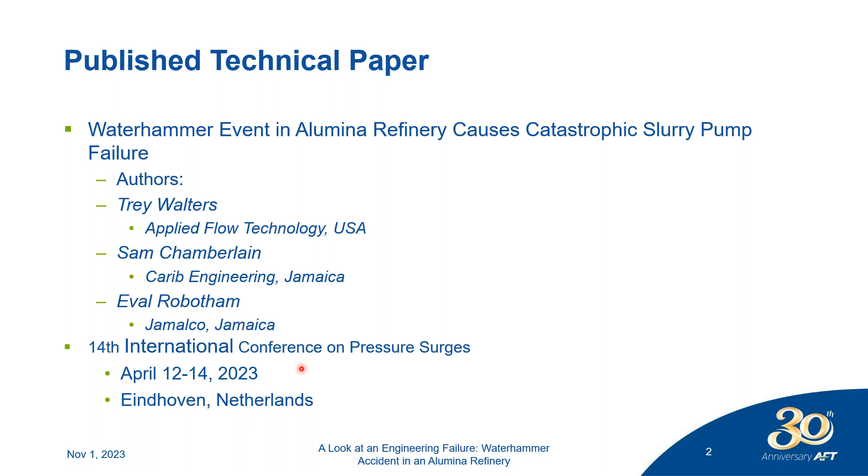Thank you, Ben. So I guess some of this I explained, but let me go through if there's anything here that I need to summarize. We talked about this already, so I'm sorry, and I apologize for the slides not advancing.

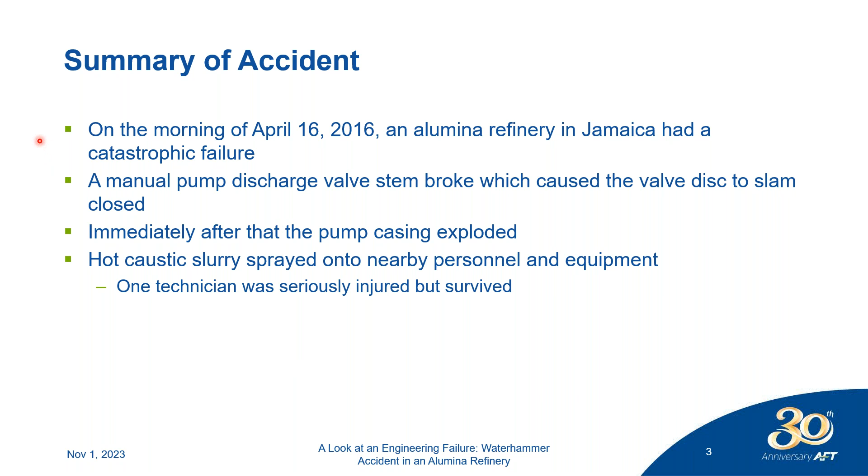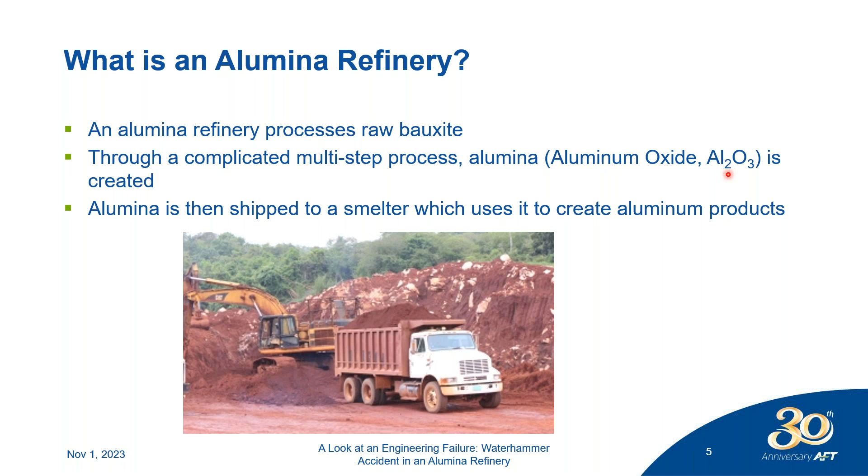Okay, let me come back to the Bayer process so we can see this better. We'll restart. Fortunately, I don't have a full hour of material, probably about half an hour, so we should be good here.

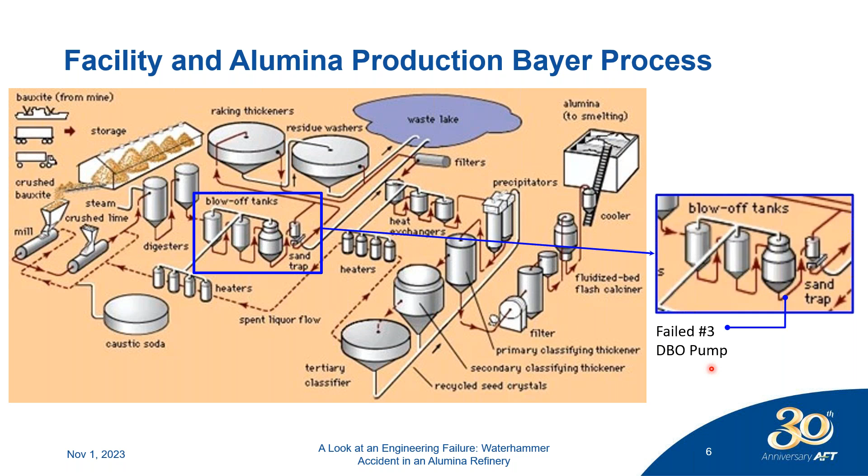Okay, so let's go ahead and dive in and look a little bit more here. I'm going to go down into the detail and talk about this a bit. It's not that complicated, as you can see in the diagram, but I'm going to outline what was going on and what happened when the event happened.

Okay, so this is the digester blow-off system, the DBO system. At a high level, there are 2 tanks that are separate physical tanks. They each have 2 lines that go out, and then the lines come out ultimately through pumps, which are the slurry pumps, the digester blow-off pumps, number 3 and number 4 in this case. They come through 2 valves, and go into a pressure measurement here, and then off to a long line that goes out to the sand trap. This is where number 3, the pump that failed, is located.

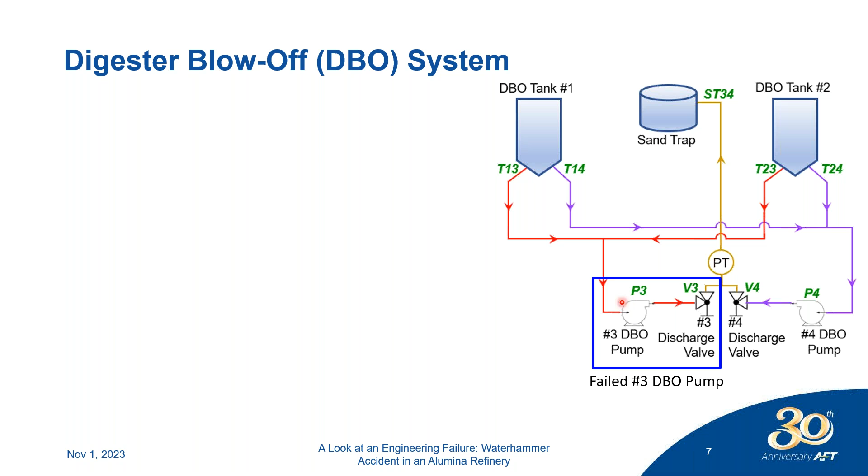Okay, and just so you can see the line lengths and diameters, this gives you an idea. The ones in purple and red are not that long, you can see we're talking about 3 to 7 meters, 9 to 23 feet. The longer line is this gold line, after you go through the valves, past the pressure transmitter, out to the sand trap, and that was about 105 meters or 344 feet. The line sizes range from 14 up to 24 inches, or 350 up to 600 millimeters.

Okay, so the fluid they were pumping was a caustic slurry with a density, specific gravity of 1.26. Near atmospheric pressure at the pump suction as it comes out of the tank into the pumps. The discharge was about 4 bar gauge, roughly 60 PSI gauge at the discharge of the pumps. The pumps themselves were rated for 100 PSI, about 7 bars, the maximum pressure rating. The temperature of the hot caustic slurry was 110 degrees C, 230 F, a little bit over boiling point, but that was because it was slightly pressurized, a little over 1 atmosphere, so it could hold the fluid in liquid form at this point.

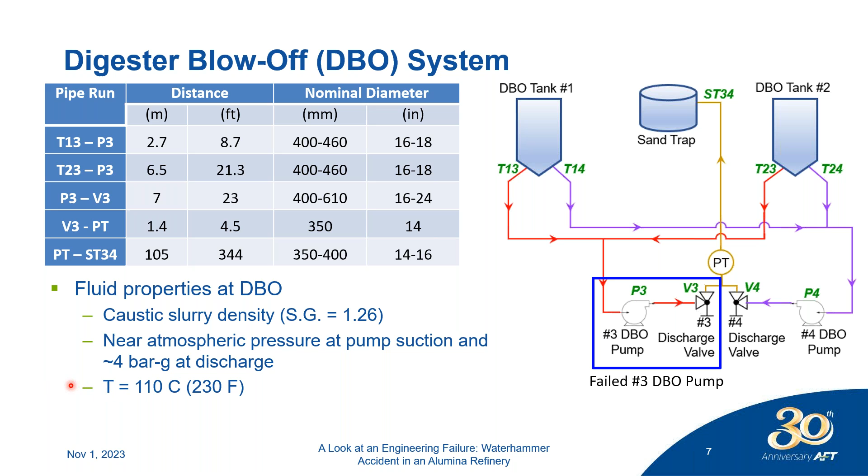Okay, so let's now talk about the operating procedure of what happened here. There are 2 pumps that serve the 2 DBO tanks, pump number 3 and pump number 4. I'm not going to talk about it here, but there was also a whole other identical separate process with the number 1 and number 2 pumps, and 2 other tanks. So there were 4 pumps altogether, 4 tanks. In general that doesn't matter, except for the fact that there was a repair history and service on the 4 pumps that is actually important to why the accident happened. I will recap that more at the end.

Right now we're going to talk about this part that was called unit 2 operation. There's 2 pumps, but only one operated at a time. Every morning the pumps are cycled. The reason there's 2 pumps is to have some redundancy, like a spare pump.

The practice at the facility was every morning they would switch from number 4 pump to number 3. They would run number 3 for 24 hours, then switch back the next day to number 4. So each pump ran about 50% of the time, every other day, running the full day.

The summary of the procedure over 8 minutes was - I'm going to go through this step by step what was going on - but this was early in the morning at 6:29 a.m. local time. They'd have number 4 pump running and number 3 pump off.

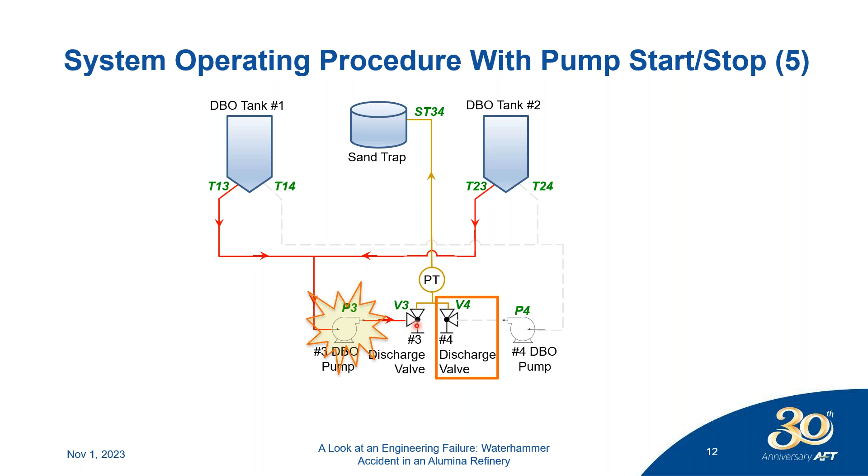But they never got there that day, because in the step between closing this valve and turning off this pump, in a window of about 8 minutes, this valve broke. The valve stem slammed shut, and when it slammed shut, that sent a pressure wave from the discharge valve number 3 back to the number 3 DBO pump, and that's the pump that actually catastrophically failed.

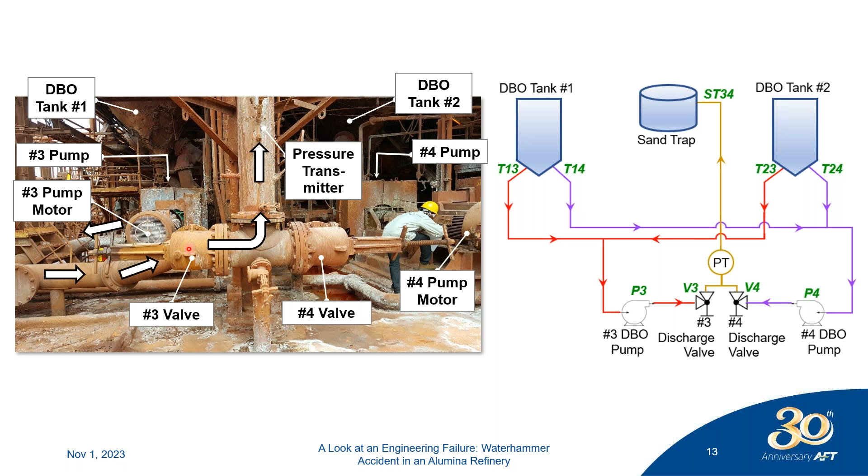So when that happened, it caused this disc to move inside in such a way that the fluid was coming in, it caused the disc to move and caused the fluid to come to basically an instant stop, like a Joukowsky pressure spike. That's what happened. So this valve broke, the pressure wave then went down this line back towards the pump, and then the pump behind here will show you what happened to the pump.

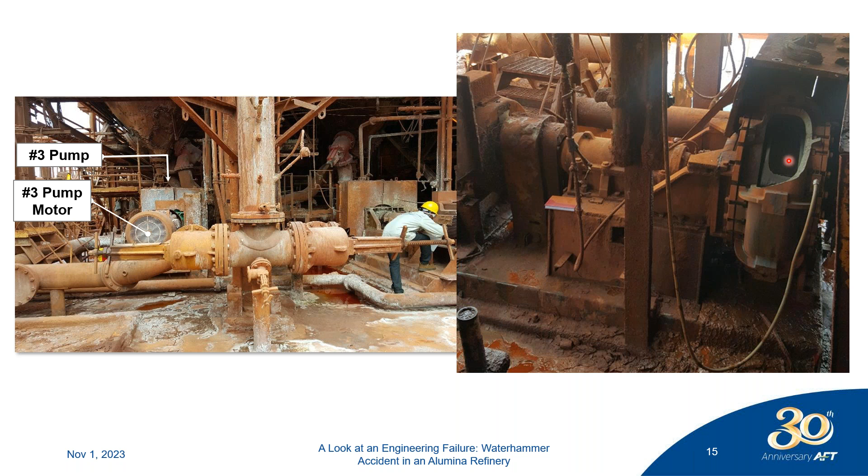Somebody had asked about the model of the pump, and you can see now it's a centrifugal pump, and it was made by Goulds. There is some information in the technical paper that'll tell you some of the specs on the pump.

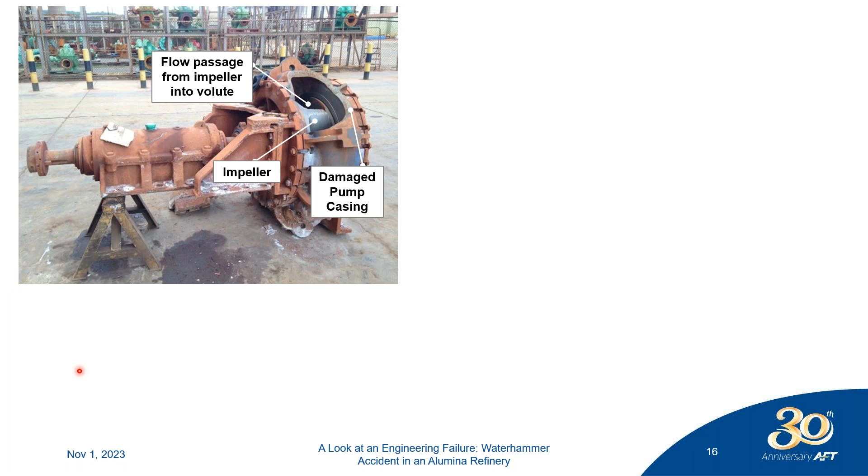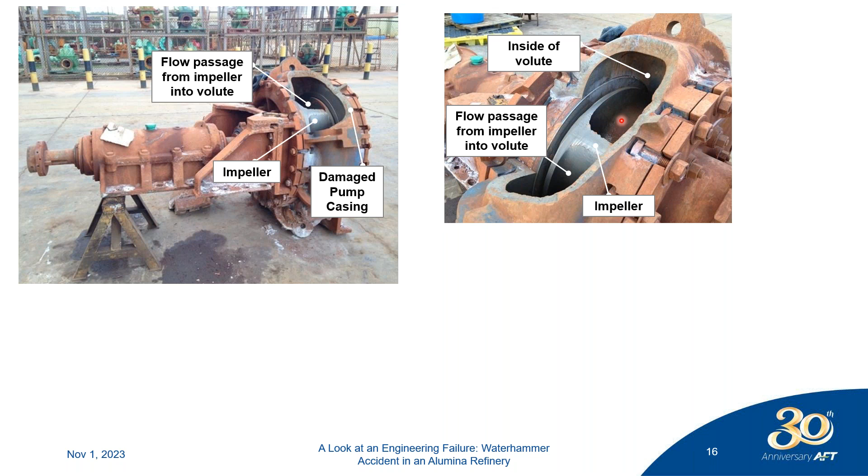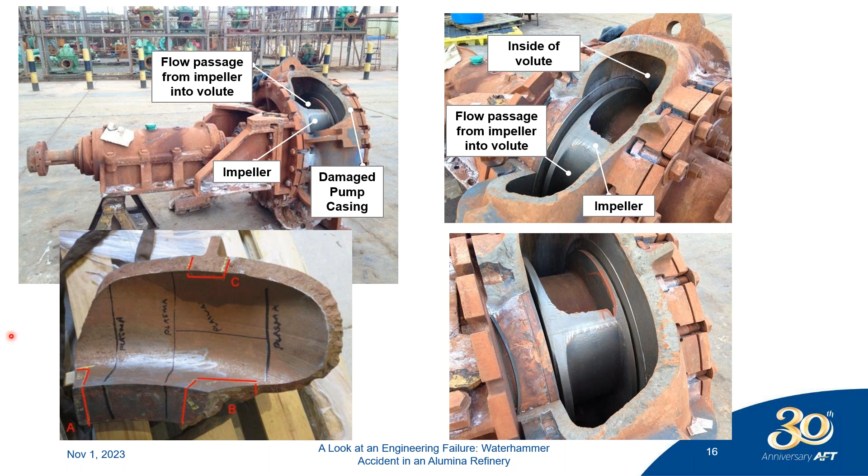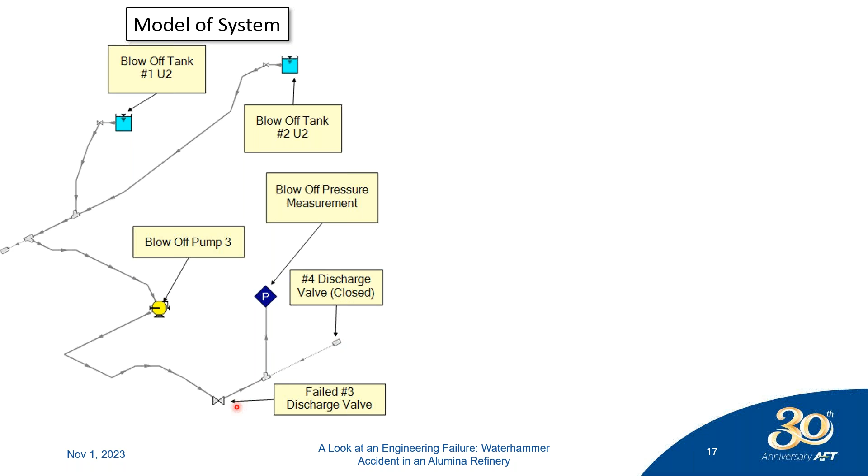Once this valve closes, the rest of the piping and the number 4 pump and everything else over there is completely isolated. So what we care about is what's coming through up to this point here, with this valve closing instantly. That's what the model looked like.

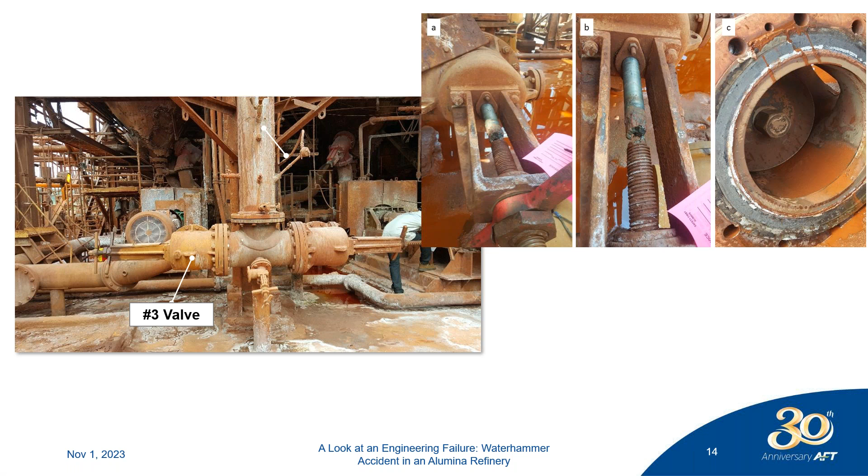to this slide right here - this is that number 3 discharge valve. Where this had the fracture on this valve stem spindle, this had been broken before, and they had welded it back together. They hadn't replaced it, they had decided they'd just weld it and go on with it. So this broke on the valve stem in a way that had broken before - it just hadn't broken at the point in time that would cause this accident, and it was a way that they could repair it.

So getting back to where I just was, the discharge valve had broken before. So we had a pump that had a history of cracks and leaks among the 4, and then we had a discharge valve that had broken previously.

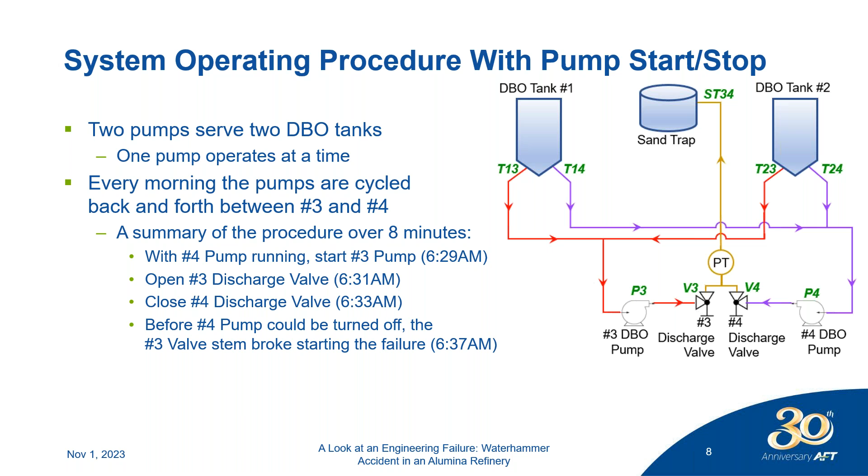And then another contributing factor was that these pumps, they would cycle them. I mentioned this earlier, just to go back and talk about this again - the process was to run each one for 24 hours while the other one was off, then cycle it back on for the subsequent 24 hours. So what that means is for every 24 hours, the pump was cooling off.

It was operating at 110 degrees C, or 230 degrees Fahrenheit. So it would pump hot fluid for 24 hours, they would turn it off, it would cool throughout the next 24 hours, then they'd turn it on the next day. So it was getting thermal cycling every 24 hours - it would heat up, then cool down the next 24 hours. That's part of the contributing factor here.

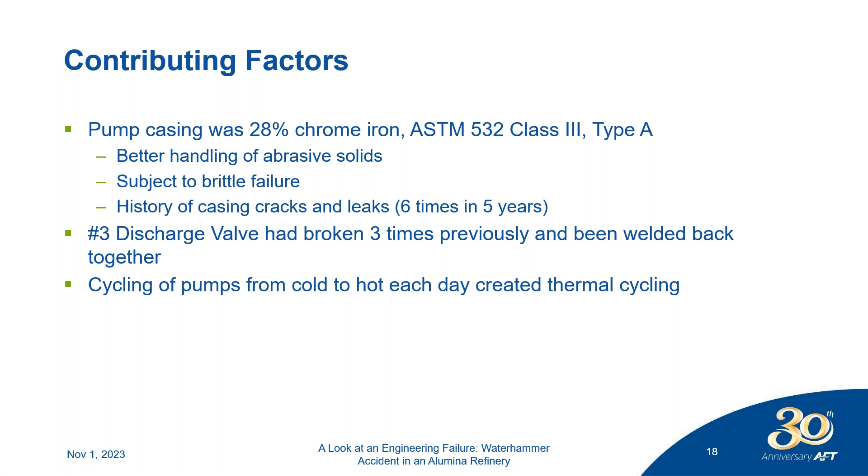Okay, so some conclusions. I would like to say that you could draw some - excuse me, let me get my laser pointer back - that this could tell you some real clear things about what to do design and operationally, and it's kind of hard to do that. I've talked to people, and I don't really know the answer to avoid this. To me, it's not very satisfactory to say, oh, bad stuff happens and there's nothing you can do about it. But that's kind of what it sounds like in this case.

Obviously, if the valve had broken before and they'd welded it, maybe one of the things is don't weld valves back, buy a new one and put it in. I don't know - when you're in an operating facility, sometimes you don't have that option. You've got to get production back up and going again, and that's kind of your best option over ordering a new one.

Anyway, some conclusions are: valve slam after mechanical failure can cause catastrophic system failures. I've heard of this happening in other systems as well - catastrophic valve failures or mechanical failure of the valve slams shut, and then it causes a water hammer wave that causes damage in the system.

More attention should be paid to system design where valves can slam closed after mechanical failure. Some valves, the way they're designed, if the valve stem breaks, they're just going to go to an open position, and you're not going to get this happening. You could obviously have other implications of that. If the valve fails open and you can't close it, and you have another way to do it, that can also have its own risks. The risk here is the valve closing upon failure and slamming closed.

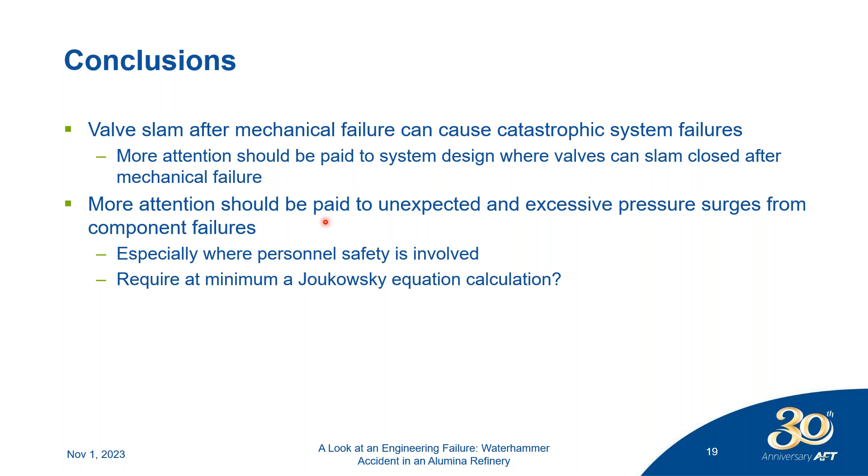Question here also from Alex: why would alternating the pumps, as opposed to doing planned maintenance transitions, cause more damage as it happened in your case? So it was a decision that was made that's how they operated, presumably to try to make sure that both pumps were in reasonable operating condition and would both run regularly. And so if there was a pump that did have an issue that had to be taken out of service, then they would not alternate. They would close that pump out, and they would let the other one run 24 hours a day until the pump that needed service could be serviced and put back in operation.